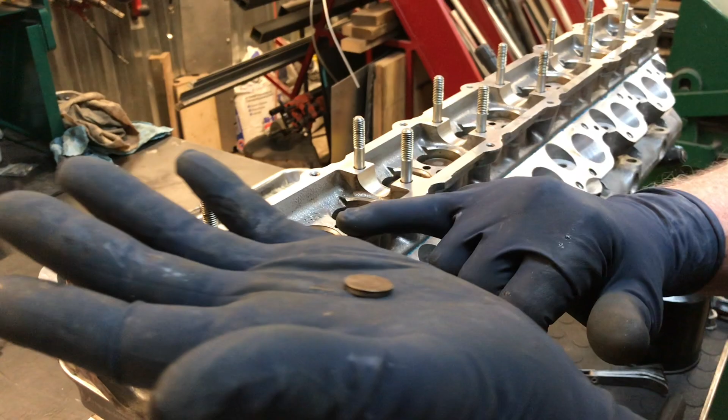What we have to do at this point is we're getting ready to install the camshaft and the tappets. Now, what has to be done prior to that is we need to determine what shim we're going to use in each one of these locations. And it's all going to be different because each one of these valves and seats has been ground different amounts. So they're all sticking up different distances above the cylinder head before we installed the springs and the retainers and the keepers.

So now what you could do is, when you take the engine apart, you could just keep track of which shim goes with which valve, and just put them back in as a preliminary measure. Then once you get the cam bolted in, you can take your feeler gauges and find out whether you're on or not, which you're not going to be if you ground the valves.

Now, I'm testing a theory this trip that if you've got a specific valve stem height, or the distance that the valve is sticking up from the cylinder head, and you're going to need one of these, a valve stem height gauge, in order to determine that, being that all these cam boxes and all these cams should be easily within 1/1000th of an inch of each other as far as dimensions are concerned, assuming that you don't have any abnormal wear, we should be able to develop a chart that tells us what shim should get us pretty close for any given valve stem height.

So what I've done is put together a chart, which I'm not going to show you yet until I know that it works. And I've determined what shims I need for these different locations. Now in this one right here, I'm going to need a 99 thousandths of an inch thick.

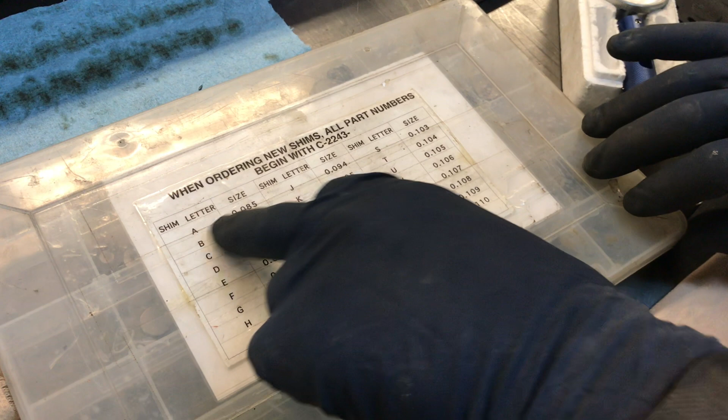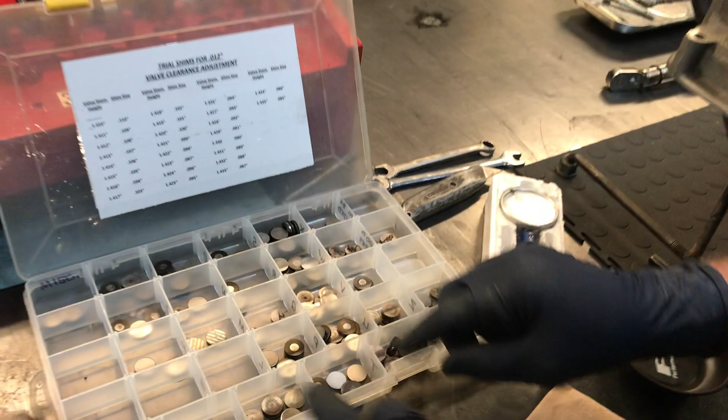Now you notice that right here I've got my little box o' shims. And you'll notice that on the front here I have the different dimensions for the letter size. Shim A is 85 thousandths. Shim Z is 110 thousandths. And then I've got these little compartments broken up. If you shoot from this side over here, you can see A through Z. And I've got a little spot for miscellaneous ones as well that don't fit anywhere.

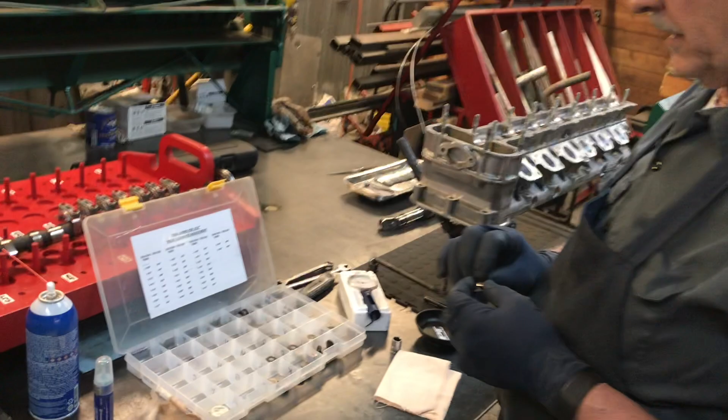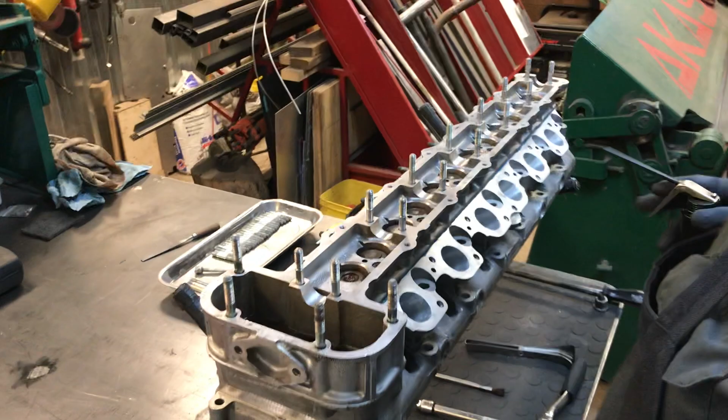So what I've determined is that for the exhaust valve on A1, I need a 99 thousandth shim. And just for giggles, because believe it or not, my organization systems do break down occasionally, I will measure it, and I can see that that is 98.5 thousandths. So I'm calling that close enough. So I'm going to put a little assembly lube in there, and you can see that little pocket where the shim fits in. And there you go.

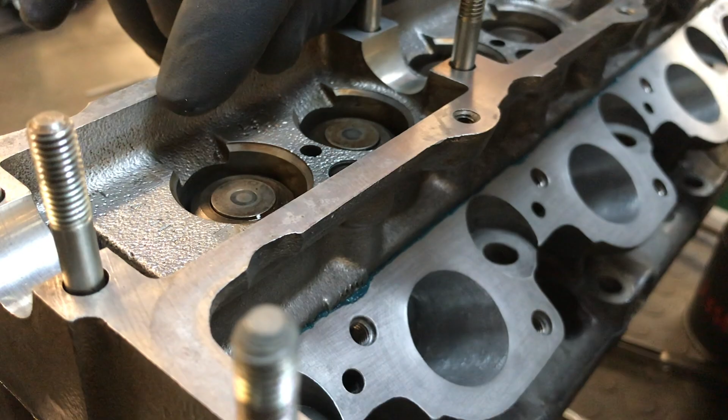Now this is an important point right here. If you've had your cylinder heads done by another party and you haven't gone through them, with some of the issues that these cylinder heads can have that we showed you during the cylinder head tech video, at this point what you really need to do is come over here, and as long as you can rock that shim on the end of the valve, you at least know that you've got enough valve stem sitting up.

If they ground the end of the valve stem to gain clearance, there's a possibility that you may not actually even be able to rock this shim, which means that instead of pushing on the valve stem, it's pushing on the retainer, and every time that cam comes down, that whole assembly is going to chatter and it will fail. So this is sort of your last chance to check and see that you've got an adequate amount of valve stem on the end.

Okay, so as you see, we've got the shims installed all the way down here, and they all look good. At this point, what we're going to do is install the camshaft. And what I'm going to do is take a little assembly lube and put it in each one of these bearing saddles.

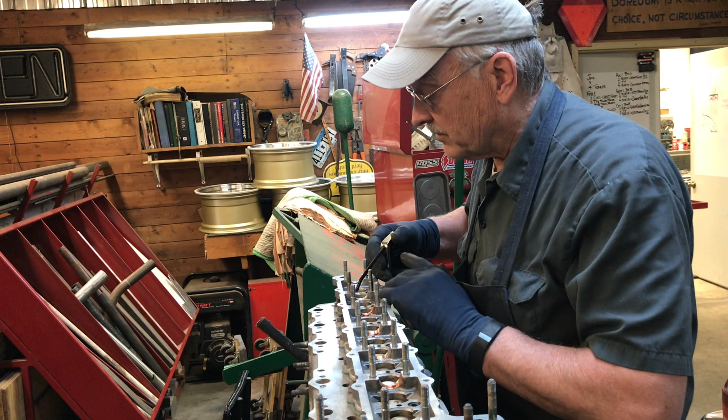Now what I use is Clevite because it is super sticky, and a couple of high-level engine builders I know use this stuff, and it just seems super sticky, and it seems like it's going to hang in there for the first few seconds that the engine is attempting to start.

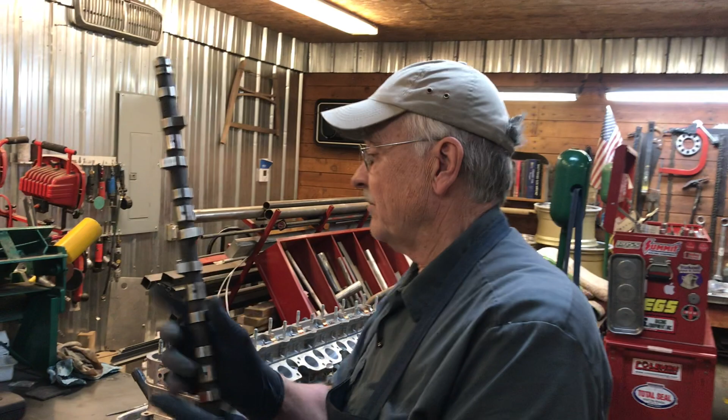Okay, so we got that in there, and what we're going to do now is install the followers, or the tappets. Now these are the shims that originally came in it. I'm just going to take them out and drop them there. What I'm going to do here when I install these, and I'm not going to show you the whole process, is give them one final spritz of air to make sure that all the dirt's off them, and then take my assembly lube and do three things.

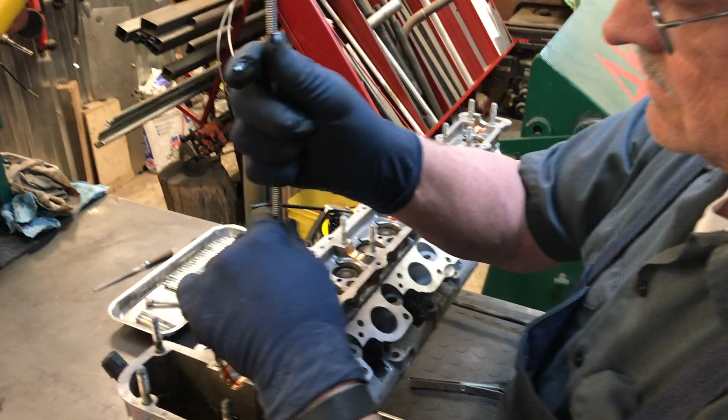First of all, put it around the outside where it's going to be riding in the bore. Put a little on the top to lube the cam as it's rotating around. And also put a little bit on the shim. And then take this tappet and set it down in like that. Yep, that's good. There's no foreign material or nicks or anything. So that cylinder is ready to go. What I'm going to do now is go down the line and do the rest of them, and we'll have you check back when I'm putting the cam in.

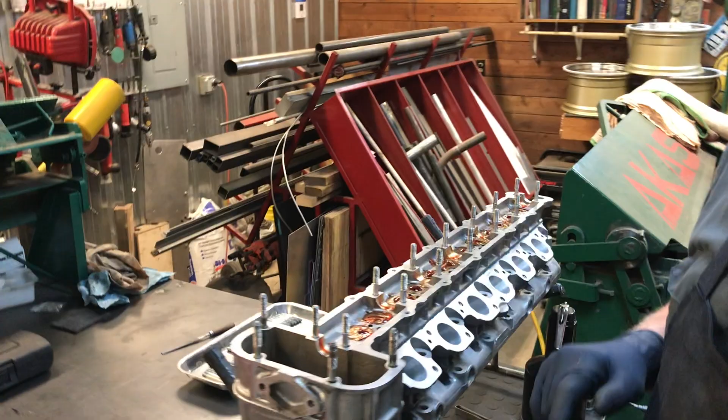At this point, we've got all the tappets installed with the shims in between the tappet and the end of the valve stem. This is an important step right now. Take your finger, and the tappet should be pretty much flush or a little bit below the cam box at this point. So just run along here and double check to make sure they're all like that. And you know what? Right here, we got a little bit of a problem. This one's sticking up a bit.

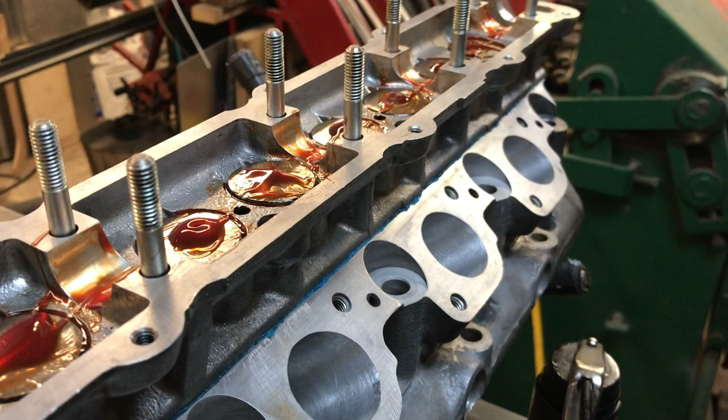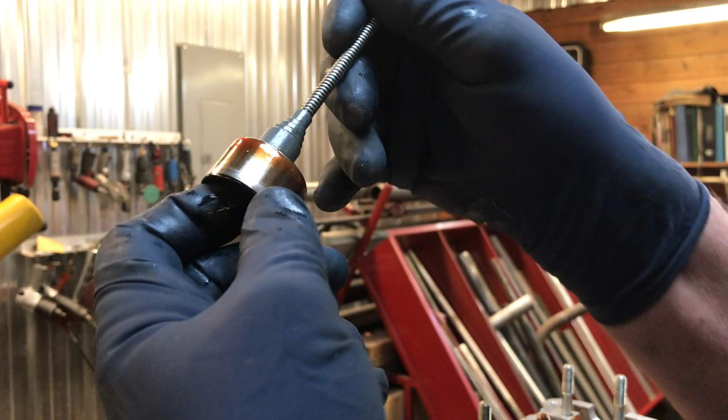Imagine that. Okay, that's because somehow the shim got off center. It fell out of that little pocket there. So what we need to do is set that in place there. And you can see now that we are a little bit below the cam box.

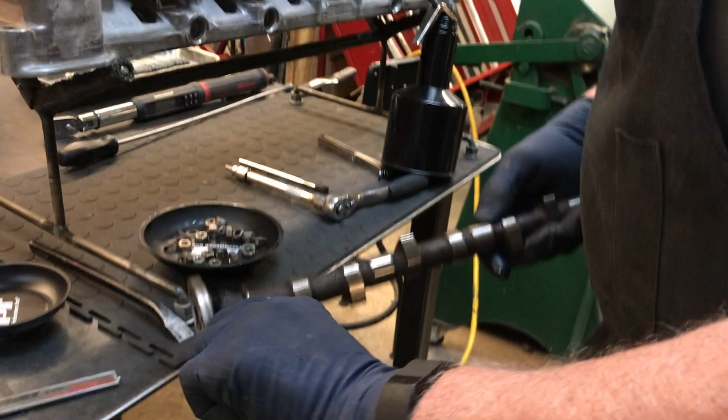All right, so at this point, we've added our assembly lube to the bearings. And what we're going to do now is install our camshaft. Oh, one thing I forgot to do, you want to install lube on both sides of there because it rides on both sides of that first bearing. You don't want to gall that. And by virtue of the fact you've got all that lube in the bearing saddles, we can just set this thing in. Now we're going to rotate it around so that we've got it as close as possible right here to the bearings.

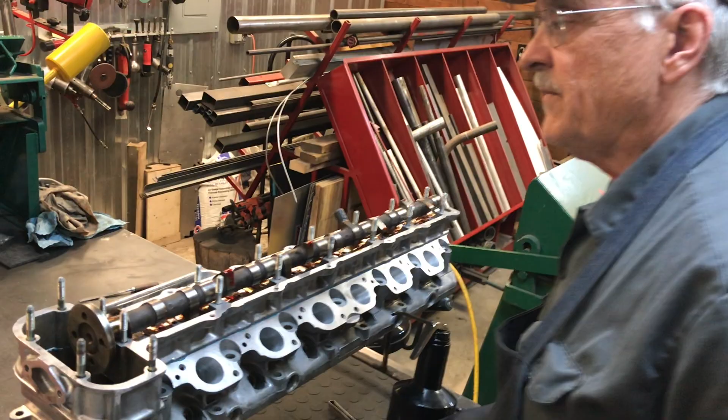Now the reason it doesn't fit down, of course, is that you've got some valves that are supposed to be open at this point. So we're going to install our bearing saddles. That's going to involve shooting a little assembly lube into the bearing saddle and on the faces. Now this first one is the one that takes the thrust loads of the camshaft, keeps it from moving back and forth. Another thing is that the number 1 here goes on the down side.

You can see right here you've got these holes that the water rails fit into. Those are on the bottom of the head. So the numbers go to the bottom. And just take your time. Because they fit so close, you have to kind of pick the camshaft up a little bit. And there you go. That's the first one. Second one, and so forth.

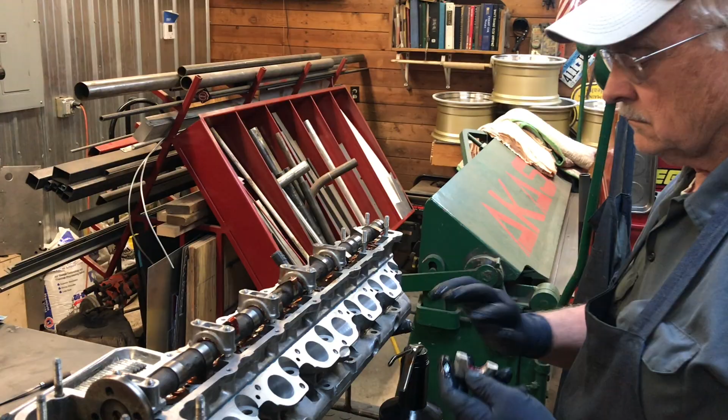Okay, so what we're going to do now is rotate the camshaft around to see if we can get the maximum amount of thread showing on these bolts in the middle, number 4 bearing saddle. And there we are. You can see we got a couple of threads showing. We're going to put a couple of washers on there. And we're going to put a little lube on the nuts that go on, and there's only going to be maybe one thread that's catching there. And the same thing on the other side.

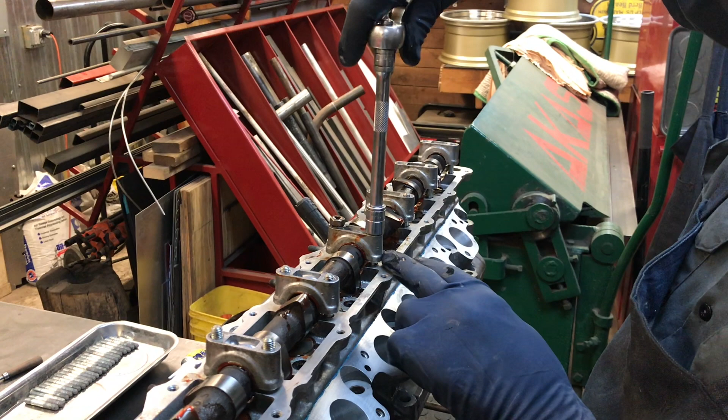Okay. Now, we're going to carefully tighten these because we just barely have a hold on the end of that. Now, what we're not going to do at this point is just keep tightening this one down and putting all that stress on this camshaft generated by the springs and the valves. It probably doesn't hurt anything to do that, but it just seems to me that it's not a good idea to torture parts into position.

So what we've got here is the front end, we've got plenty of bolts showing here. Back end, not so much. So I'm going to tighten this down to the point where I can do the same thing with those two bolts back there.

Everything's getting kind of sticky and slippery at this point, so I'm hoping I don't drop anything into the head here. Not that that's a big deal at this point. Oops. A little bit too much on this side. Okay. Now these will loosen up as we go along, but that's not a big deal at this point. Not a big concern.

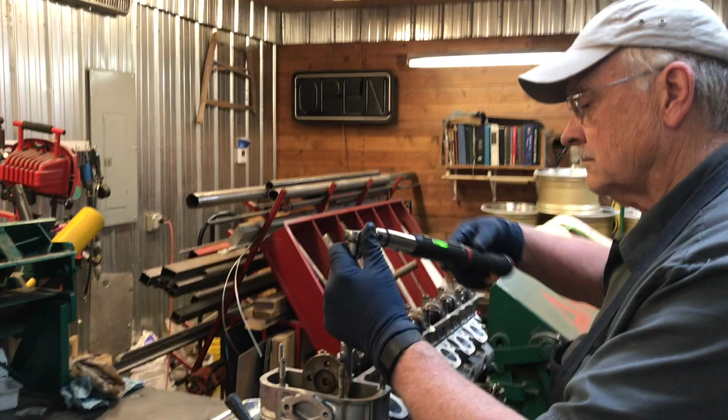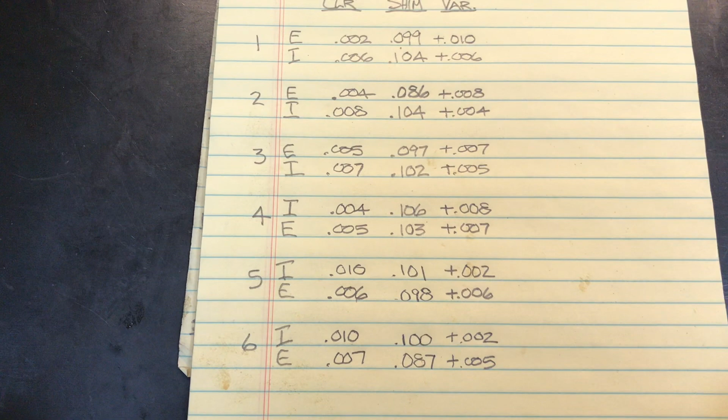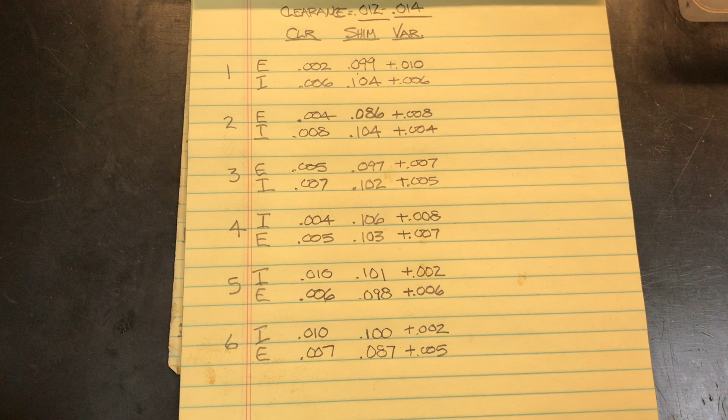Okay. Next step that you need to do is to make a chart like this, or a form to record your results. Now, you can see that we've got cylinders 1 through 6, and we go exhaust, intake, exhaust, intake, exhaust, intake on the first 3, and then intake, exhaust, intake, exhaust, intake, exhaust on the last 3. And that's because that's the way the valves are situated on the cylinder head. I drove myself nuts going intake, exhaust all the way down, and then couldn't figure out why my results were changing. I did it 4 or 5 times before I finally figured it out. That was a while ago.

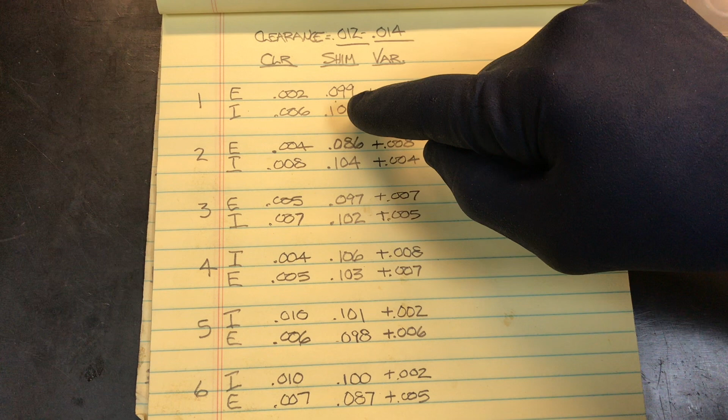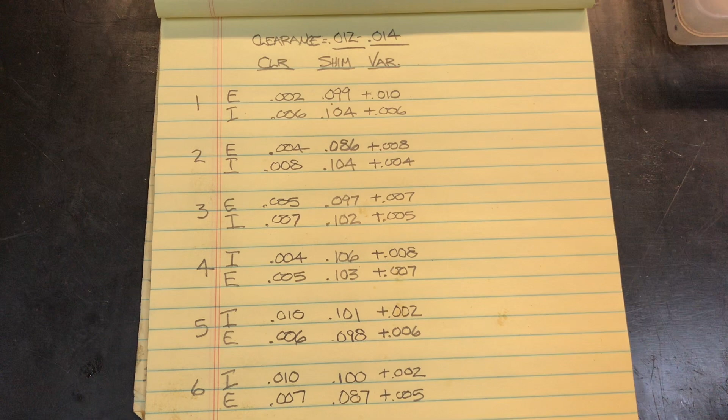Now you can see that once I got this set up over here, what I did then is recorded the shims. Now remember I said that I've got a theory that for a specific valve stem height, there should be a specific shim. So that's what I did here. I installed a 0.099, 0.104 in cylinder number 1, and then recorded all that information. Then I came over here to the cylinder head, and I'm going to do the intake on cylinder 5 and the exhaust on cylinder 6, because that's the last one I ended up with here.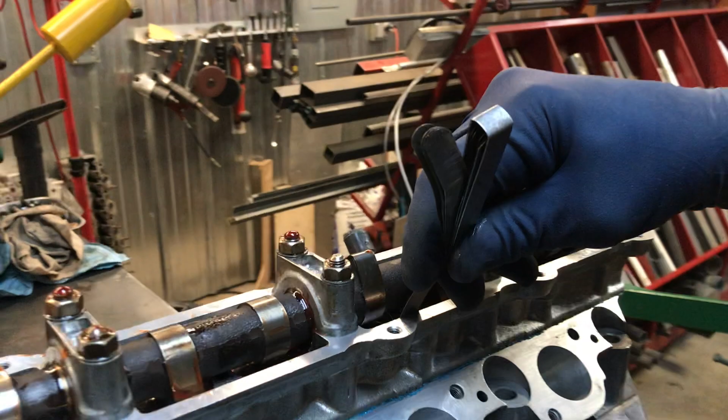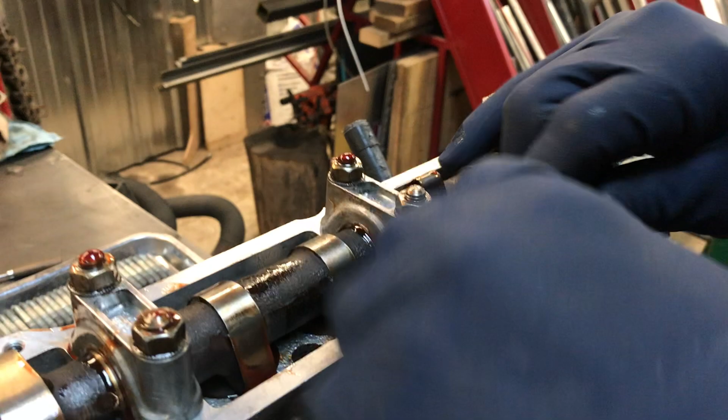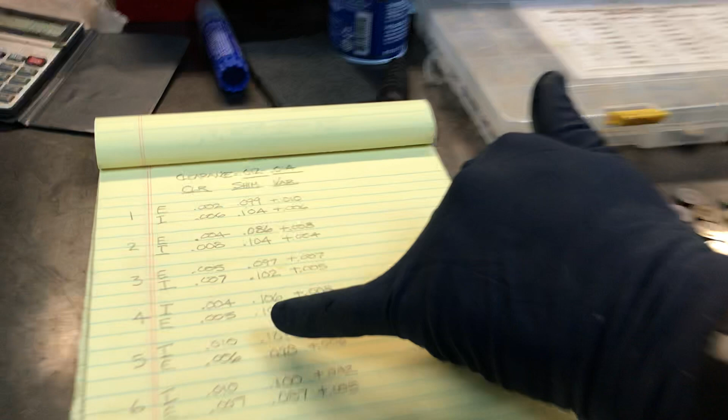What you do is, first of all, start out with 12, which is as small as the tolerance goes. It should be between 12 and 14 thousandths. Okay, nothing. That felt like it was pretty tight, so I'm going to go to 10. Oop, 10 goes in. A little tight, but it goes in. So I come over here. That was intake on 5. You can see I recorded 0.010, 10 thousandths of an inch.

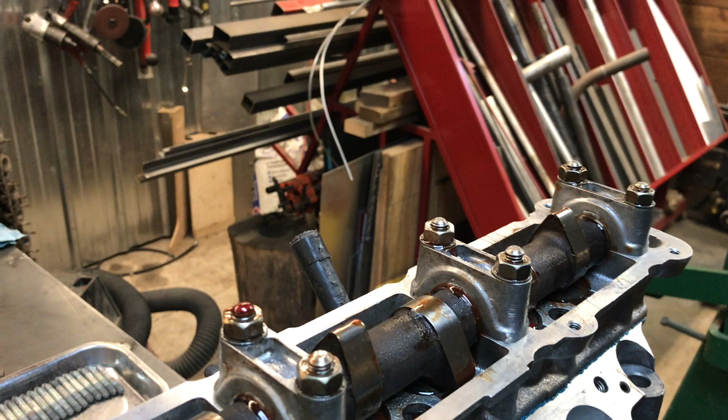Then exhaust on number 6. Tried 10 again, no go. Felt really, really tight. So let's try 8. Nope. Try 7, if I can find it here. There we go. 7 goes in, 0.007. That went pretty easy, so I'm going to try 8 again.

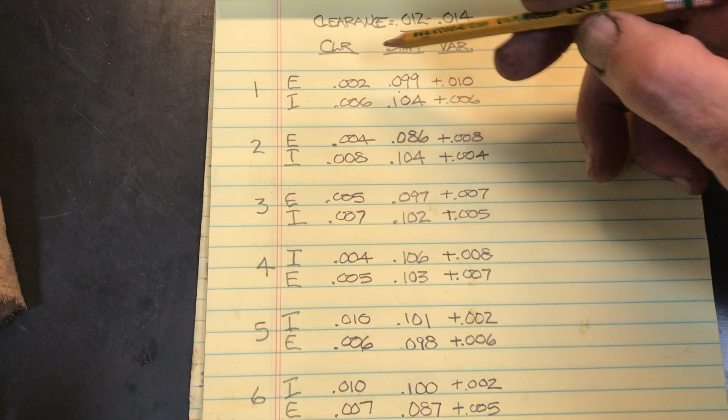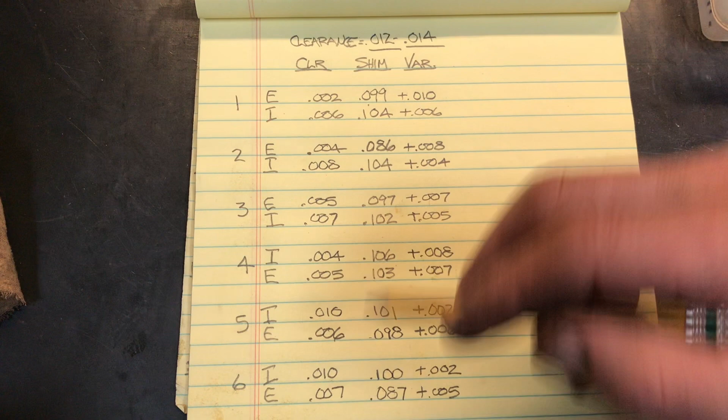You look at our little table here, you can see that all of the clearances are much smaller, except for 5 and 6 on the intake side, than what my theory would have projected. So there's some holes in it, and I don't know that our results would have been any better than if we'd have just taken the stock shims and stuck them back in and used those for preliminary adjustments.

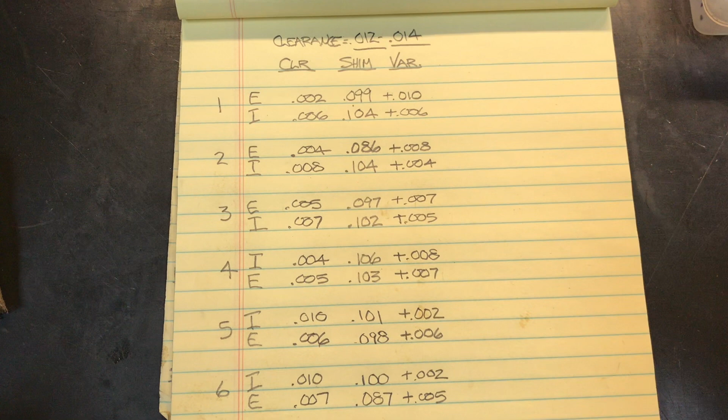So what we do at this point is we take the minimum clearance that we want, 0.012, subtract the clearance that we found, which is 2 thousandths, and we come up with plus 0.010. Now, variation is the word that I'm using here. Not sure if that's the correct mathematical term, but we're going to go with that. What this means is that if my clearance is 2 thousandths of an inch, which is way too small, my shim is 10 thousandths of an inch too big.

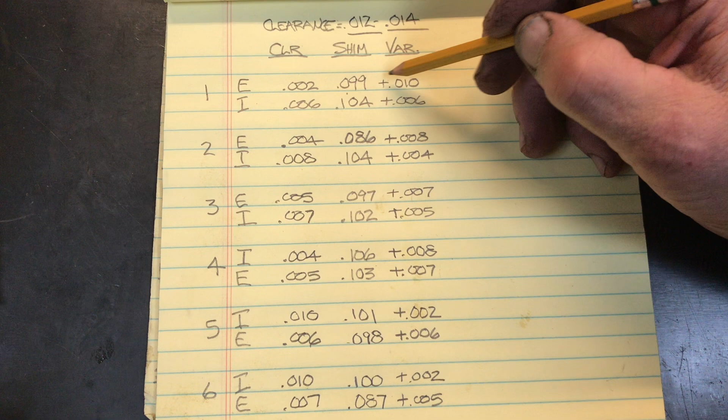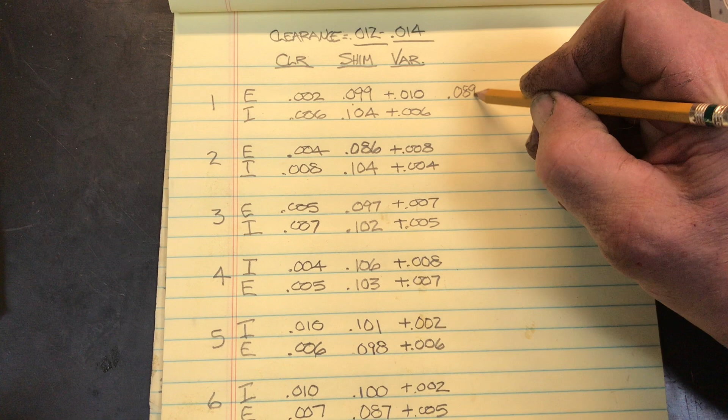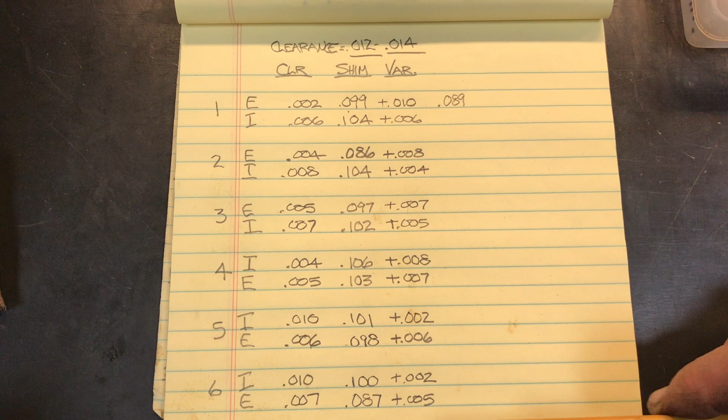So what I'm going to do is go to my little box of shims here and find a shim that is 10 thousandths of an inch smaller than 0.099. And that would, of course, be 0.089. And then I'm going to go down the line and figure out what the new shims ought to be. At that point, I should just be able to find those shims, remove the camshaft, remove the tappets, and then install this row of new shims, and it should be really close to 12 thousandths of an inch.

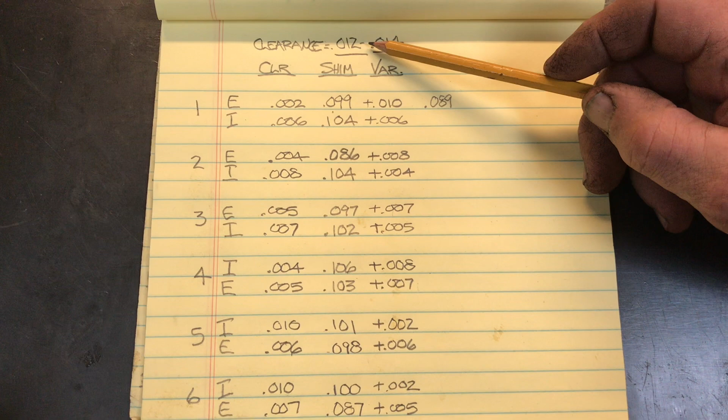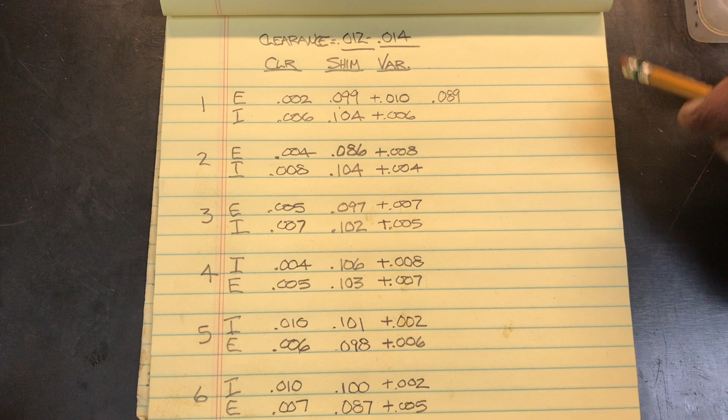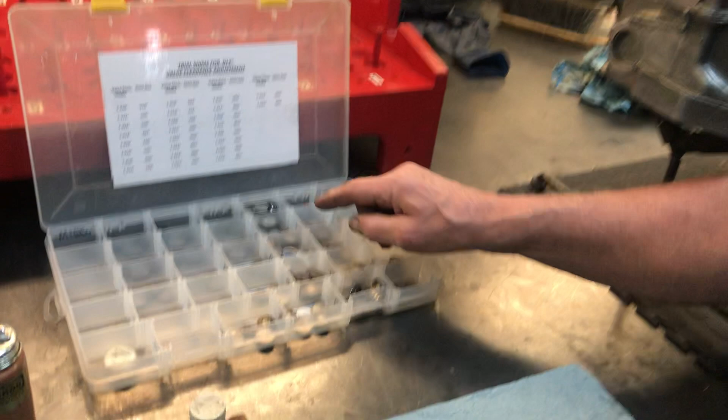If you want to be sure that you hit the range here, you could go to 13 thousandths, which means that it would be 11 thousandths of an inch, and this would be 0.088. And work it that way if you wish. So, now you might be asking yourself, what do I do if I need a particular shim and I don't have it? For example, if we're looking at my little box of shims here, you can see they've got tons of S, R, Q, P's, but as we go down the line here, there's several spaces where we only have 2 or 3, and there's a few spots where we don't have any.

Well, you've got options. First of all, if you're down at this end of the scale, maybe even smaller than an A, you're going to have to have some shims shaved or ground. Now, there's a pretty easy way to do that. Most machine shops will have something called a surface grinder. If you need to take one of your thicker shims and have it ground down 3 or 4 thousandths, that's really the way to do it. A surface grinder is a magnetic table that you put your shims on, they throw a lever and it activates the magnet and holds onto it, and then you can move the table or the grinding head back and forth.

It's a wheel that's oriented vertically, and you just pass it over the shims and it takes however much off you want, just little bits at a time, of course. You don't want to go too fast. These are hardened, and you don't want to heat them up to the point where you anneal them, which a machine shop isn't going to do. So that's the way to do it. Take the shims that you want into the machine shop, tell them what you want done on each one of them, and they'll probably have it for you in a couple of days.

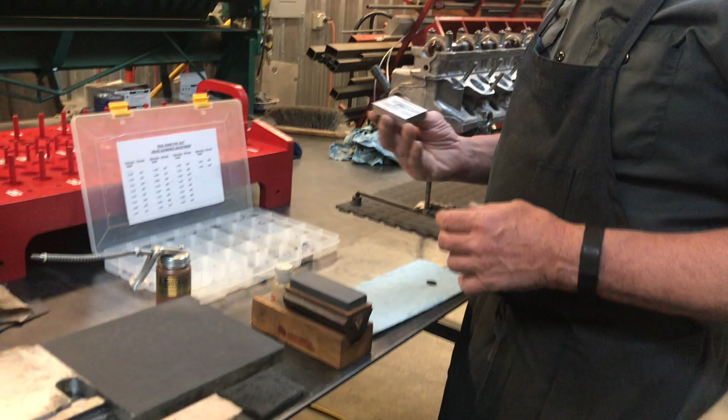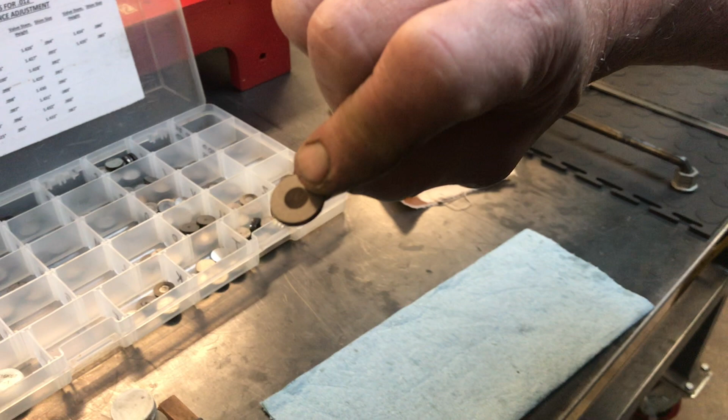You can use either a stone or a piece of material with some wet or dry sandpaper contact cemented to it. Now what I've got here is a little holder for the shim. It's just a piece of aluminum that has a little cavity machined into it. First, let's clean this up because there's some crud on it. First thing you do is put a little dot of oil in the middle like this and put your shim in. Now you'll notice that on most of these shims, it's obvious which side has been down. You can see that there's a little circle in the middle. That's where the end of the valve has been tapping. And that's probably about a 1/2 of a thousandth thinner at that point than it is outside of it.

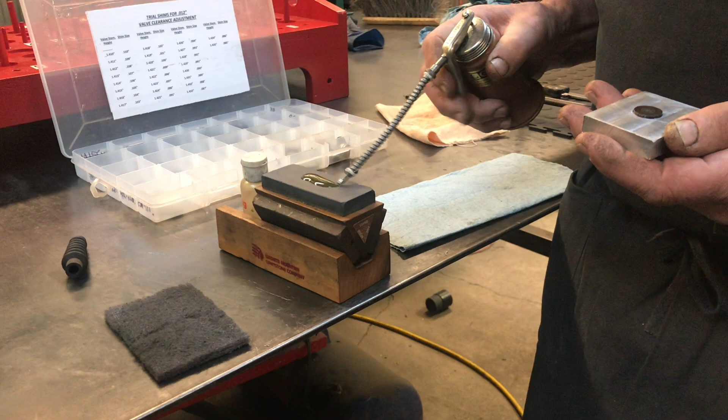So what I do is I make sure that that circle is down. That's what I'm going to be grinding on. Now, what I've got here is just a stone that I've taken over to my belt sander, and I do this occasionally with it. Sand it flat. Belt doesn't like it much, but you got to do what you got to do. And then we take some oil and spread it around. And then because we got the oil under the shim, we can put it upside down like this.

And we know that in order to remove that circle in the middle, we've got to go a 1/2,000 of an inch. And keep moving the shim over the entire surface of the stone so you can keep it as flat as possible. Because you want to keep the shim, the two surfaces of the shim, parallel to each other. Because if they're not, the shim is only going to be making contact at one point, and that might be hard on not only the shim but the tappet as well.

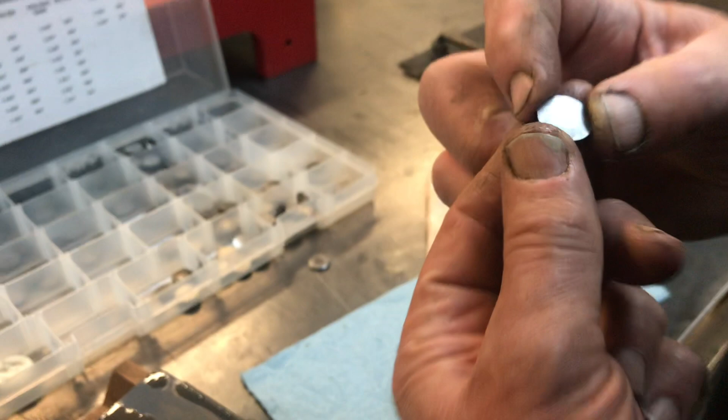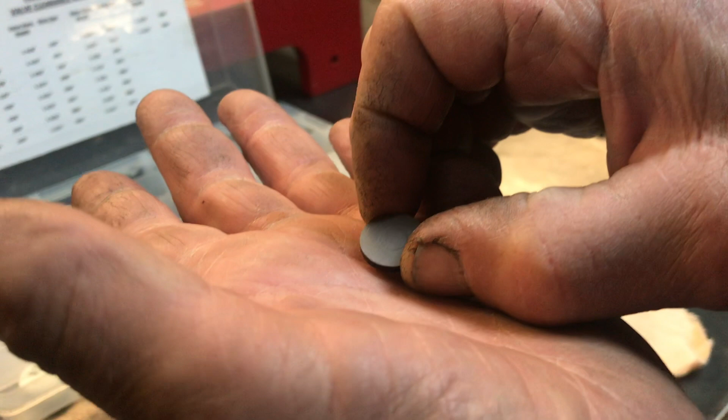So we do this for a while, and there we go. Pretty interesting. At this point, you can see that that's almost gone. And there's another good point. I don't know if you can see that it's actually a little, let me wipe some more of this crud off of here for clarity's sake. You can see that it's in kind of a half moon shape right now. You can see that it's been worn more on one side than on the other. Okay?

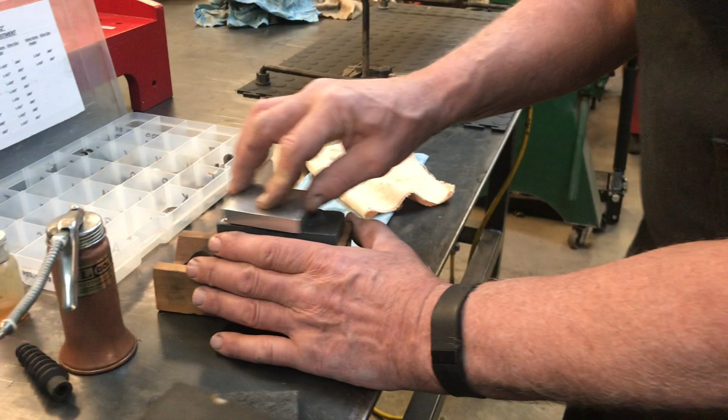That's a good thing, because you can use that to determine whether that surface is still parallel to the other side or not. So you got an indication of where you need to be grinding. So I would need to apply just a little bit more pressure on the back side of this than on the front. So we can keep doing that. Again, being mindful of where the shim is on the stone, try to keep it as uniformly worn as possible. There, that's better.

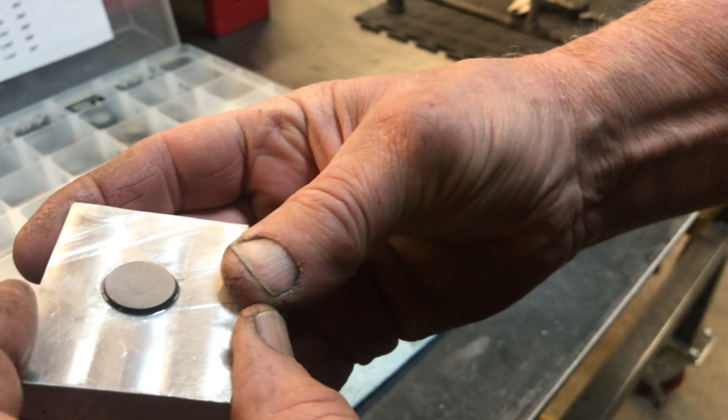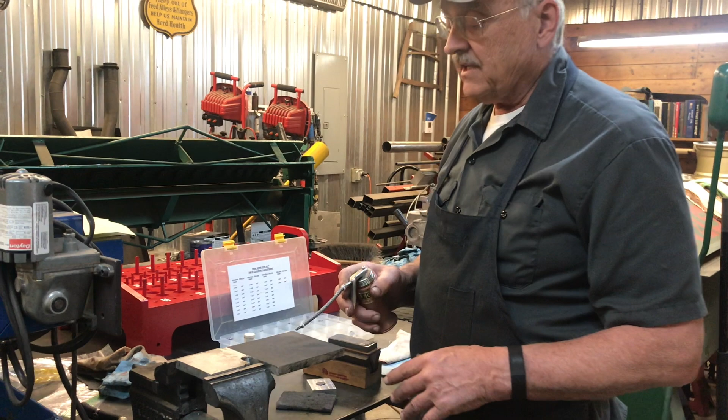Again, I don't know if you can see that or not, but when you get that out of there, when it's perfectly flat all the way across, you know that you've removed a 1/2,000. You've got another 1/2,000 to go. Now this other one here, I use if I've only got maybe a 1/2,000 or 1,000th or less to do. Again, this is a piece of 320 grit wet or dry sandpaper that has been contact cemented on here. A little bit of oil on the surface, and essentially the same principle. You want to keep moving it all over the place so that you're not wearing all the grit off of one spot.

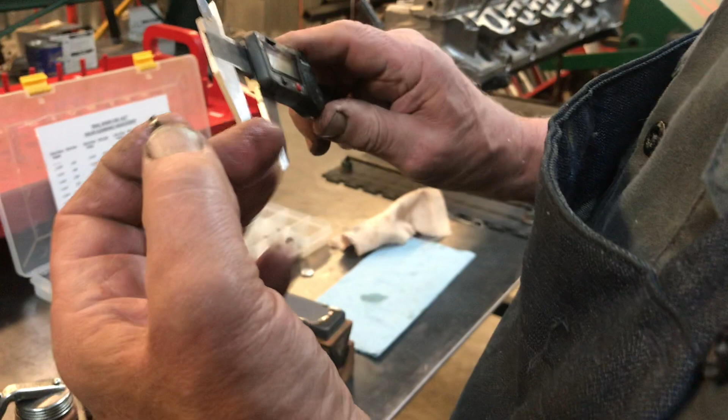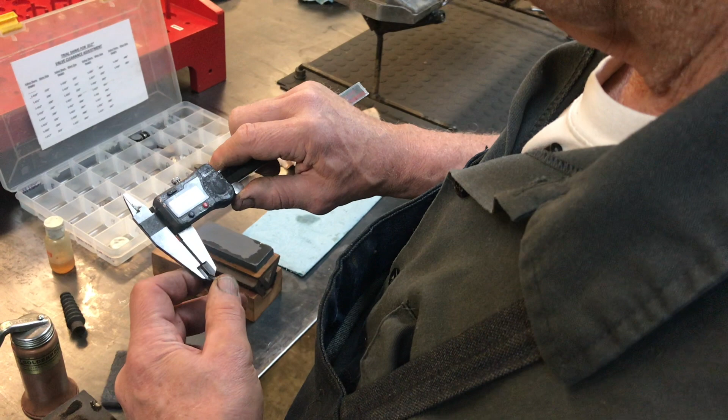And yeah, that's all gone at this point. Now when I say it's all gone, I'm talking about that circle that was in the middle. And then what you do is you take your digital caliper, make sure that it's zeroed. And 94.5, 94.5, 94, 94.5, 94.5, 95.5. Now when it's 1,000th off, it's probably because there's some crap that got in between there. 4, 5, 4, 5, 4, 5. So we know that it's parallel all the way around.

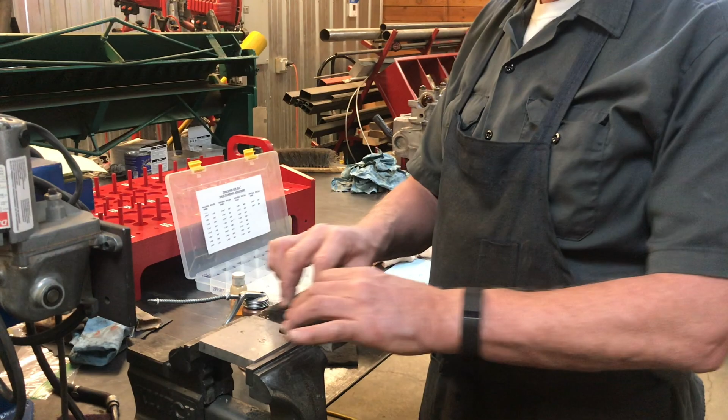Now, if I wanted to go all the way down to 94, now that I've got that circle out of there, I just simply flip it over, put the good side up, and then do it all again, get the other 1/2 thousandth, and so forth. Easy. Takes a little time. It could take you maybe a 1/2 hour to remove a 1/1000th of an inch. But again, after hours on a weekend, this is the way you can keep going instead of waiting for the machine shop to open up on Monday.

We are one camshaft removal and shim replacement away from this cylinder head being ready to go on the engine. So it's up to you whether you want to put the studs in now, also the water rails, or just wait until you get these on the engine. Makes them lighter, easier to handle, and less probable that you're going to damage yourself on these cylinder head studs. So there you have it. How to rebuild Jaguar V12 cylinder heads.